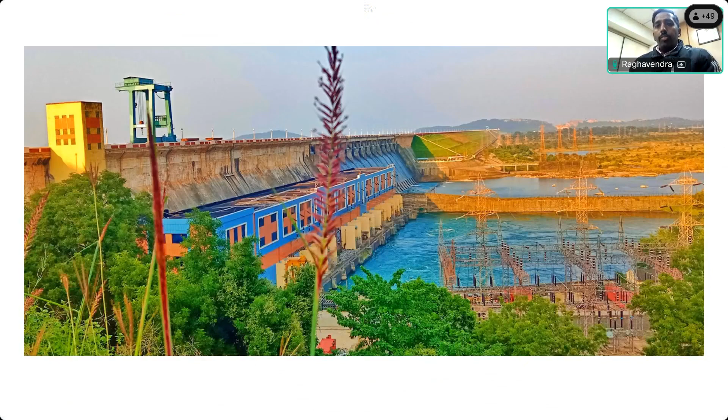Right now, as a JE, you will be posted in field offices mostly, where you will be collecting data and site observations. So you might not be knowing why design is required. At the end of the session, I think you will be able to appreciate how whatever you are doing at the sites, at the river sites or remote areas, will be useful for the design of all these water resources projects. We will see all those aspects, so that you should know at least what we do in the design wing of CWC, so that when you become AD or even DD, we expect at least some of you should come into D&R wing and serve this wing, because many people think designs are very complicated and difficult to do, and most people prefer WP&P or RM wing only.

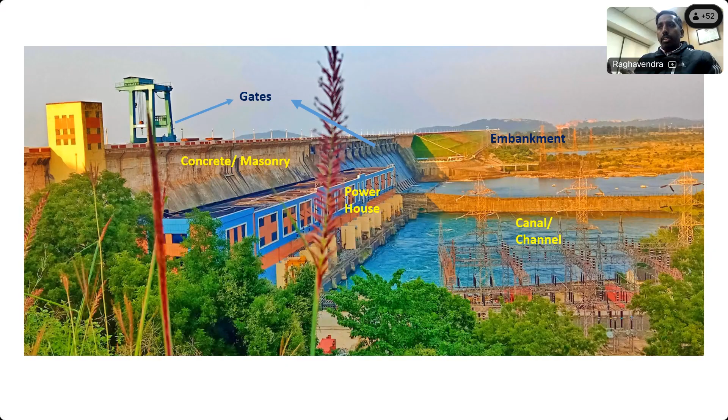There will be so many JEs in your team from mechanical background also. I suggest mechanical people to take up the gates directorate, because in CWC it's a general practice that mechanical background people will be posted in gates directorate. Some civil engineering candidates also work in gates directorate, but it's mostly preferable for mechanical. So when you're thinking, why am I here measuring the river discharge at site as a mechanical engineer - that's just passing your JE time and AD2 time. Once you come to headquarters, try to prepare for posting in gates directorate so you can apply all your mechanical engineering knowledge there.

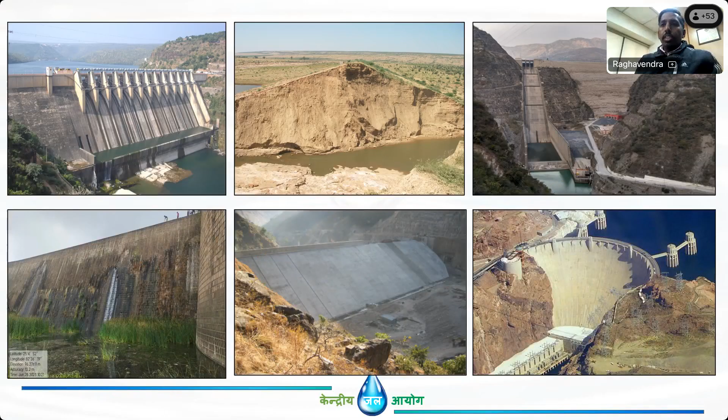So this is the background of our design unit, and these are the different components showing how we separate into different design directorates. If we see further, all water resource projects start from the dams.

So there are different types of dams. I think by now you might be identifying these different dams. Let's go ahead one by one. The first one you can see is a concrete dam. The other one is an earthfill dam - you can see it is a failed section, this is the dam in Rajasthan, Gararda Dam, which failed in the first filling itself. That's the section we are seeing here in the earthfill dam. You can see it's a complete same color material - this dam we call a homogeneous earthen dam.

The other type of dam is rockfill dam. It's nothing but an updation of the earthfill dam, because as the height of the dam increases, we will have some clay core in the central portion, and also coarser materials. These fine materials will be sustained only for some heights. This rockfill dam you are seeing is the Tehri Dam. Tehri Dam, we all know, is a rockfill dam.

The other type of dam is masonry dam. Masonry is an old concept - nowadays we are either going for concrete dams, earthen dams, or rockfill dams. But masonry is old dams; still there are so many dams built in India from long time, so there will be so many issues.

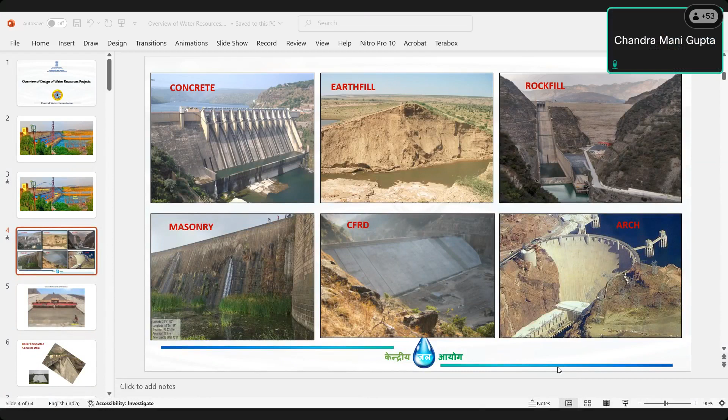I will just go very slowly. Meantime, whenever there is any disturbance, just try to see the slides, because this is only regarding the design overview. But at least you should be able to know the difference between these dams. Is everybody clear about the difference between concrete, earth filled, rock filled, masonry, CFRD, and arch dams?

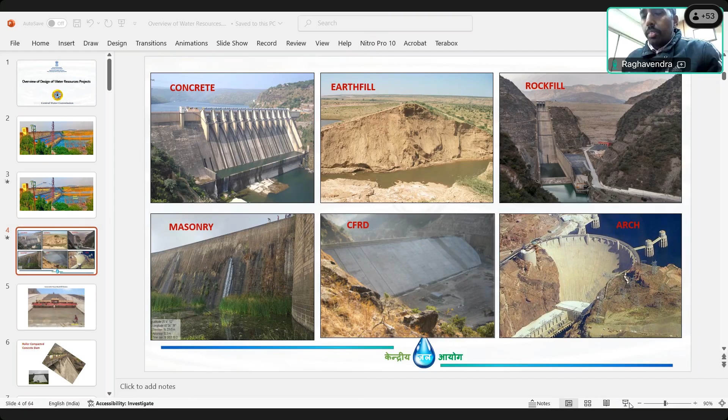Hello. Shall we go ahead with the others? Next slide. Yes sir, yes sir.

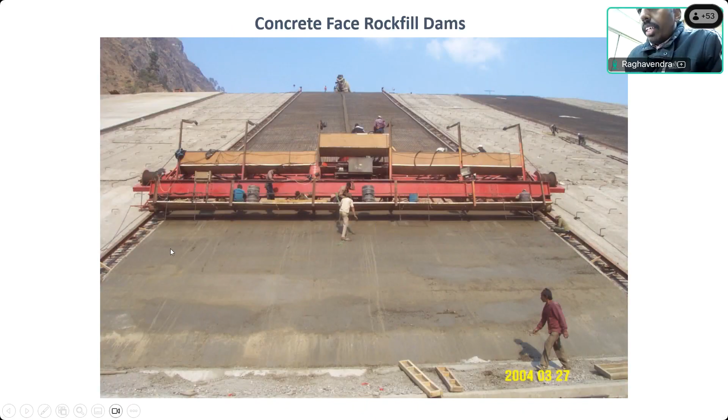As I have already explained, this is concrete face rock fill dam. In the upstream face we will have this concrete facing, as you can see here. First we complete the embankment dam portion, and in the upstream face we just have these concrete panels, constructed panel-wise, as you can see on the screen.

The other important dam is the roller compacted concrete dam. Can anybody tell me any dam existing in India of this roller compacted type? In Maharashtra we have the Ghatghar dam. Ghatghar dam is completely an RCC dam, meaning roller compacted concrete dam.

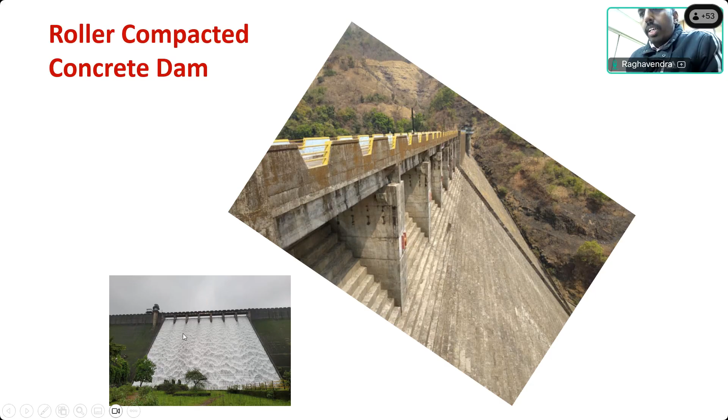It's useful for very small purposes, like check dams or small nalas, where you want 2 or 3 meters of diversion. For that purpose, we use rubber dams. Hope everybody is clear till now.

Hello? Can anybody hear? Yes, sir.

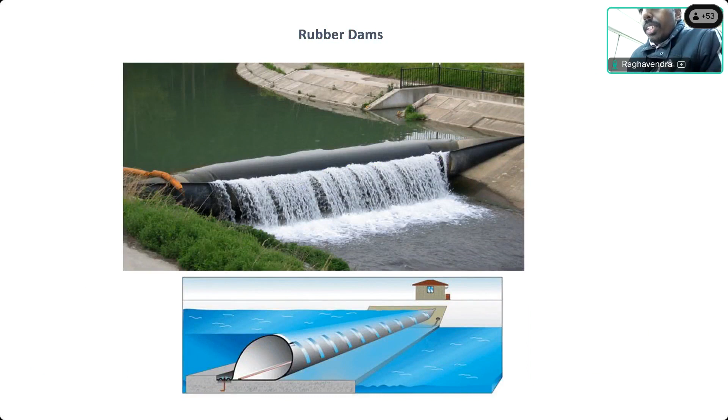So we will go into more detail - how to fix the dam axis. I think some of the JEs among you are working in investigation divisions also, and they are involved in the investigation of these projects.

Some dam axis will be very lengthy, some will have a very small, shortest portion for the dam, and as we go downstream, more water can be stored. So there are different aspects to consider.

We have to see the geology - what rock is available, what soil strength is available, and whether we can keep the foundation on that particular geology or not.

So we have to see the geology, we have to see the water availability, whatever you are collecting. And we have to see the narrow portion. Wherever possible, we have to use the narrow portion to select the dam axis.

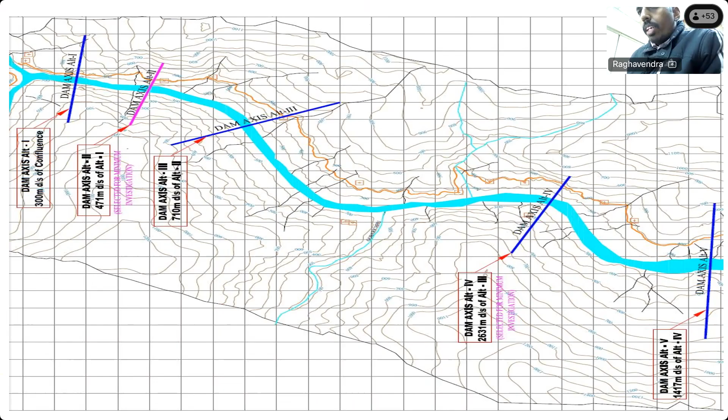So like this we have to finalize the dam axis. Once we finalize the dam axis, for the remaining components, at the dam axis we can estimate the dam design flood, then we can design the length of the dam, everything that I will cover in the coming slides.

So most of these projects, whether irrigation, hydroelectric, or drinking water projects, we all do some cost-benefit analysis, the benefit cost ratio. This means whatever cost you are incurring on the project, and what benefits you are getting from it, we do an analysis of the benefits and costs to get this ratio.

It's always better to have a benefit cost ratio more than one, because it's a general practice - whatever cost you are putting into the project, you should get profit more than the cost of the project. That's how you calculate the benefit cost ratio.

Based on the benefit cost ratio, you will also be able to select which projects should be taken on priority. Whatever DPR you do, the major basic purpose of the DPR is to evaluate the technical feasibility and financial feasibility. Technical feasibility means we have to see all the hydrology, geology, and dam designs, and financial feasibility is in terms of benefit cost ratio - what benefits we are getting and what cost is associated.

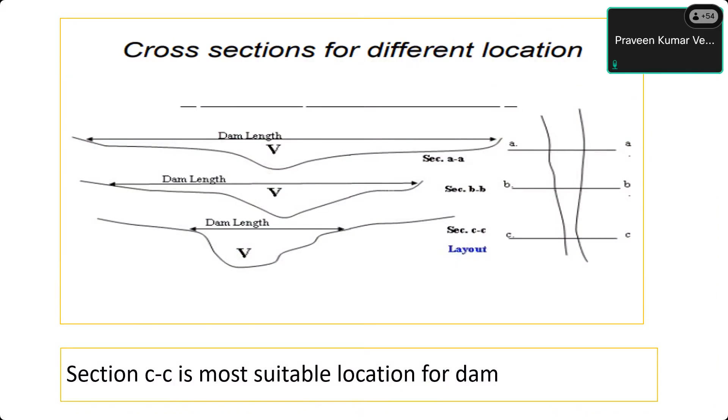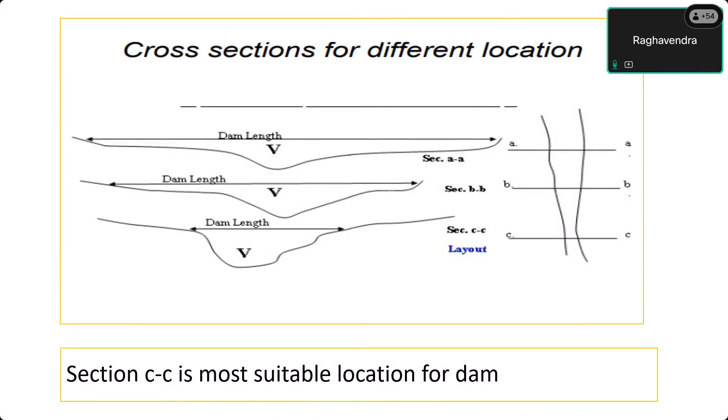So like this, we have to finalize the dam axis. The dam length is the first important criteria. Other criteria also I will try to explain. Just from here we can see the layouts. We have completed different types of dams, and how to select this dam axis, and why this is very crucial at the first step.

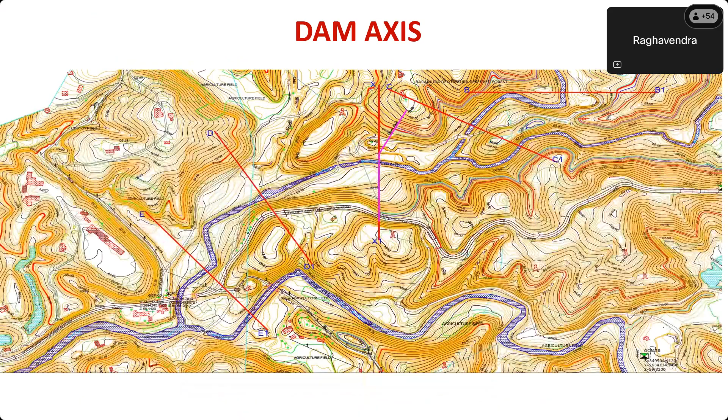So the first will be dam. Then from the dam, the water will be going through the HRT, which means headrace tunnel. Then from the headrace tunnel, the water goes to the surge shaft. Then from the surge shaft, using the penstocks, the water will go to the power house. At the power house, we'll be having turbines where power will be generated, and from there it will be transmitted using transmission towers. Whatever transmission towers you see in general places, power is supplied from these power houses. So the purpose of the HRT is to divert the water from the dam to the surge shaft, and from surge shaft to power house by penstocks.

Now, the purpose of this surge shaft - because the length of this HRT sometimes goes up to 10 kilometers, sometimes just 1 kilometer. So depending on this length, if you suddenly close the power house, there can be grid failures. In India we have power grids - earlier we used to have 4 power grids: northern region, southern region, eastern region, and western region. Each grid has so many power projects - thermal power projects, solar projects, hydro projects, all supplying power.

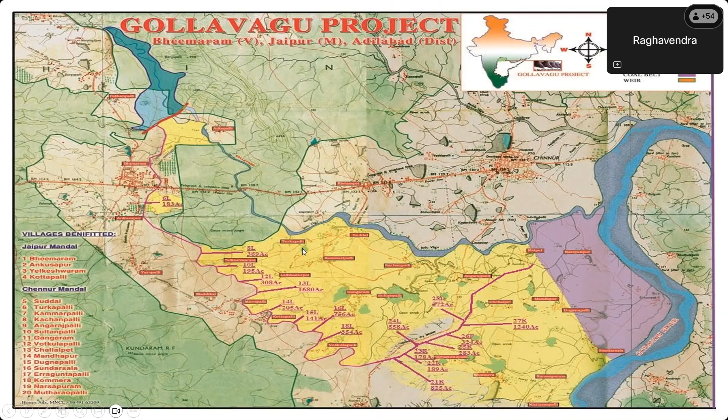So this is an irrigation project. Generally we prepare irrigation command maps like this - this is one irrigation project in Adilabad district of Telangana. The yellow shaded portion you see is the command area. All these pink colors and red color lines are the canal. You can see this - this is the dam. From the dam you can see the right side canal going like this, and wherever this yellow portion is there, that is the command area - that is where we are supplying the water to have the irrigation.

So if you see that same layout in GIS - because most people will be doing using ArcGIS and other GIS platforms - we try to provide that image here. So this is the dam where we have created the storage. From the dam you can see one canal off-taking like this. Obviously, just near the dam there won't be much requirement of water, because groundwater will always be high there. Then as you go down, you can see different branch canals, each planned for different areas - some 369 acres, 59 acres, 195 acres, like that. So each branch canal is planned accordingly.

So first we have to estimate the command wherever you require the command - first you estimate the demand of the water, and accordingly you can design these branch canals. So this is the layout of an irrigation project - it will look like this only. If this is the right side canal, you can also plan for the left side canal.

And there are ridge canals. That's a separate detailed subject. But you should know the layout of this irrigation project, how this irrigation project layout looks. So this is how we can plan the irrigation project and its layout.

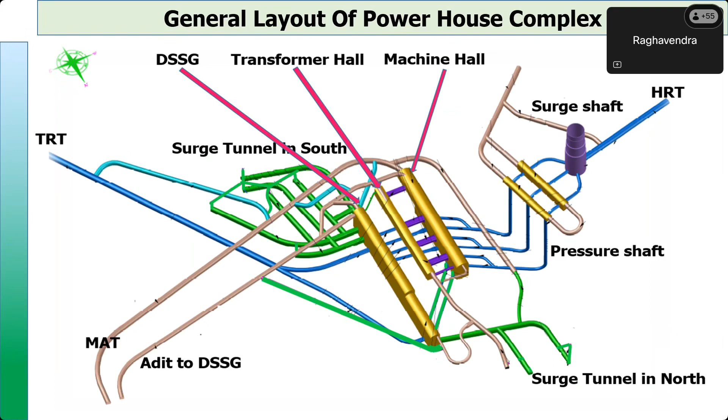Whatever power we generate will be transferred through transformers. What is the purpose of a transformer? Because in the power house, we generate power at 11 kV or 20 kV, a very low voltage. But to supply it to long distances, remember these hydro projects are located in very remote areas, some in Arunachal Pradesh, some in extreme Himalayas, some at the far ends of rivers.

So from there, we get the power to Delhi, Pune, all the cities. How do we get this power through the transmission lines? The transformer does this stepping up. Whatever voltage we generate in the power house, we have to step up. After stepping up, it becomes very convenient to transfer electricity over very long distances, even 1,000 kilometers. So that's the basic concept, just explaining here for your knowledge.

But generally we don't deal with all this electromechanical, power components, power transfer in CWC. In CWC, what we deal with is the dam. We do the designs of the head race tunnel, the surge shaft, the pressure shaft, and the power house, only the power house dimensioning. We don't even design the turbines.

Turbines and all these transformers are dealt with either by CEA, Central Electricity Authority, or by private companies, since there are many private developers also. They can also do these designs. So in any project, whether irrigation or hydro, along with CWC we have to involve other agencies, since we are only involved in the water sector. There are so many other components and agencies we require.

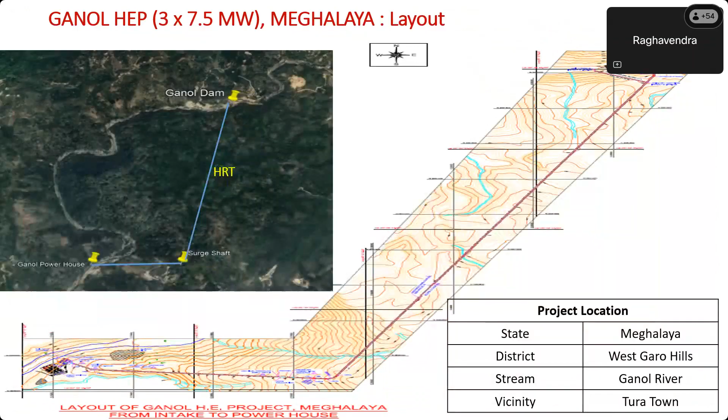CWPRS generally does all these studies on water, like when water flows through the spillway, how it will flow, and whether the flow is as per our design or not. They do the model studies. CSMRS, Central Soil Material Research Station, does the material testing, and GSI, Geological Survey of India, provides all the geological information and data. Even Survey of India, we can collect topo maps, contour data, all those things from them. So while doing the designs of all these water resource projects, it's not that we do everything individually.

We need collaboration from all these agencies, even remote sensing organizations like NRSC, ISRO. We have to involve those organizations too, and if it's a hydroelectric project, we have to collaborate with the Central Electricity Authority. So let me explain here.

In field offices we have monitoring and appraisal units. These units appraise irrigation projects only up to a certain command area. In irrigation we have major, medium, and minor projects. Minor projects, with less command area, are dealt with in the monitoring and appraisal directorates of field units, wherever you are posted. Now you can appreciate the importance of monitoring and appraisal directorates. They appraise these irrigation projects up to certain command areas only, like minor projects meaning 2,000 hectares.

If major projects, more than 10,000 hectares, they just forward it to CWC headquarters, so CWC headquarters does all these appraisals. That is for irrigation. For hydro projects, CWC does not have the mandate for appraisal. Appraisal of hydro projects lies with the CEA, Central Electricity Authority. While appraising the hydroelectric project DPRs, CEA forwards the DPR to CWC, because we examine all the civil components: dam, head race tunnel, surge shaft, power house, all these components.

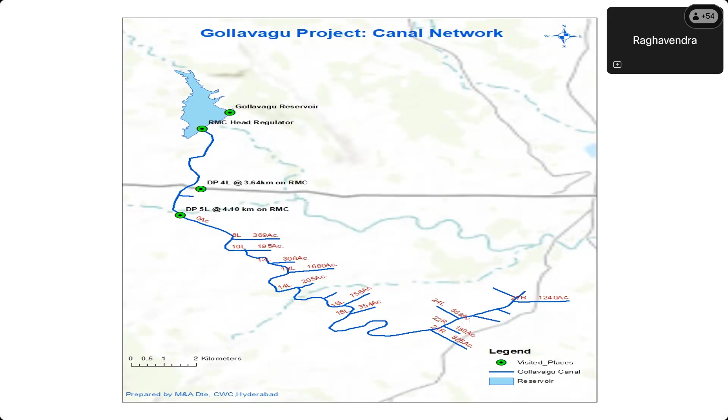So that's how the appraisal process works, and how we are involved in irrigation and hydro projects appraisal. I hope everybody is clear now about the monitoring and appraisal directorate, and how whatever data you collect is useful for the design of all these water resources projects.

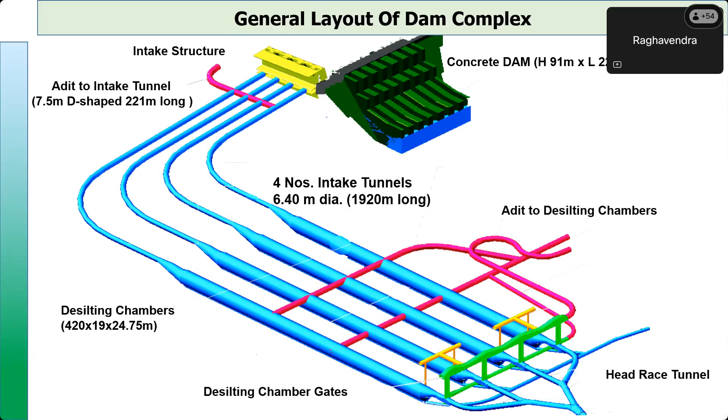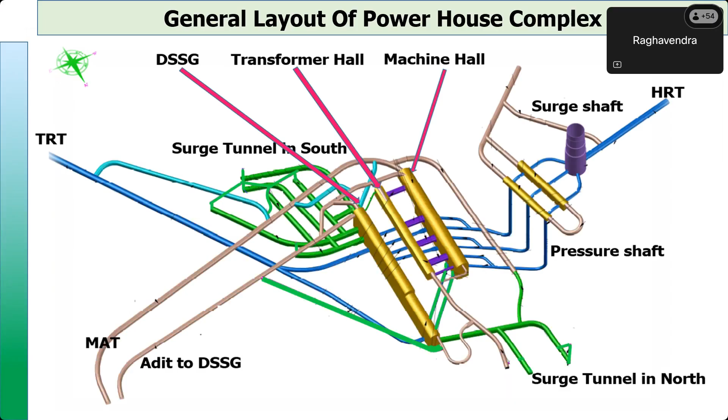Even the sediment data is very useful, because most of the dams get filled up with sediment. Like if you see the Salal Dam in Jammu Kashmir, it is completely filled up with sediment. So the basic purpose of dam construction is now getting lost because of sedimentation. That's how whatever data you observe at the site is useful for all our design purposes.

So moving ahead, these are different layouts of the hydro project. You can see the hydro project layout here. The dam is here, and you can see so many lines. On both abutments, both sides, this white color is the river. On the river left side, we have some tunnels, and on the right side also we have some tunnels. So this is a very complex layout.

If you see a simpler layout, the same project, the first image can easily be optimized into the second layout. That's how we generally examine layouts, and we generally avoid complex layouts. Complex layout means, as you can see, all these small dots on both sides are all tunnels.

Whereas in the second image, you can see all the tunnels are placed on one side. That's how, when we do the appraisal in our design units, we also check for different dam axis locations and different project layouts. You can see this first project layout is very complicated, whereas in the second image it's a very simple layout, with all the tunnels located at one place.

So why is it complex? Because the geology is very complicated. That's why, as I told in the beginning, since you are at the very start of your career, I think you should pick some topic of your choice — geology, hydrology, dam design, irrigation and canal design, or even remote sensing.

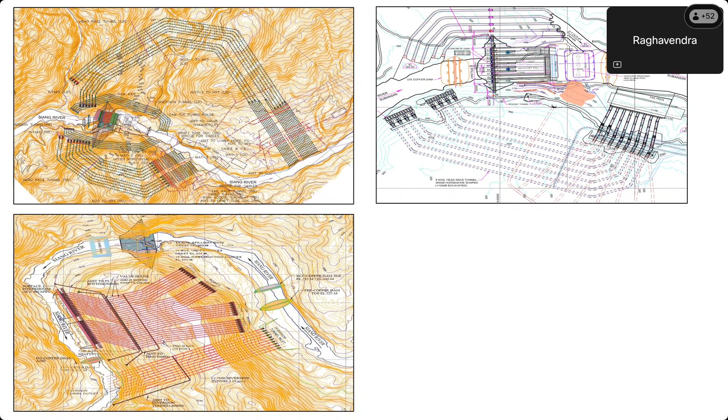So to start construction of any dam, we create a water-free area by diverting the water using tunnels, between these cofferdams. You can see here this is also a cofferdam — the tunnels on the left side are used to divert water during construction. This entire area will stay dry while we construct the dam using this tunnel, with water diverted through here. Once the dam is completed, we remove these cofferdams, store water in the dam, divert it through the headrace tunnels to the power houses, and generate electricity.

So now we'll see the different issues, generally what issues will be coming in different components. So this is the dam. So in the dam, we will see.

I already explained till now the foundation issues, because as the dam height increases, everything is stress. If you have a very small dam, very small stresses will come, small load will come. If the dam height is more, load will come. So we have to see the foundation, whether the existing rock or the available foundation can take the load or not. And shears, this is a new term. Just I will explain briefly, because wherever you have this foundation, it's all formation of this earth and rocks.

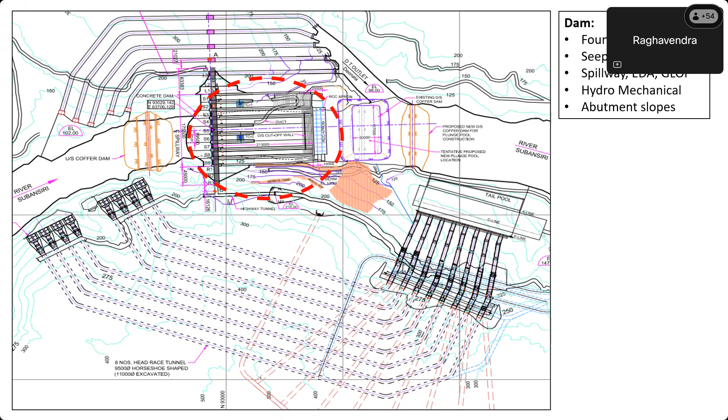So that's how these gates also play a very important role in designing all these dams. Next is the abutment slopes. In all our dams nowadays we are doing the design of 200-meter dams. To start construction, first you have to do the excavation - 200-meter excavation of the river, that side slope of the river. So that 200-meter slope should be stable, right? So those abutment slopes also we have to do the stability analysis.

Then if you see the issues related to power components, like I already told, sediment is the biggest issue. Whatever data you are measuring is very useful for sediment. Then again slopes, because wherever power houses are there, we have to again do slope excavation, so there will be slope issues. Then there are so many underground tunnels, even underground power houses, and surface power houses - surface power house means just like a building we construct on the natural profiles. But wherever underground power houses are there, there is big underground excavation we have to do.

So those issues, surges - like I explained, the purpose of the surge shaft is to absorb these surges. Like suddenly if you close the turbines, water hammer will generate. To absorb those water hammers, water shocks, you need to have these surge shafts. And all these structures - it's so common, even a normal building will show cracks - so in the dams also we'll see cracks, in the pondage and the power houses also we'll see cracks.

And flooding, because these power houses are generally located close to the rivers. So when the river is flooded, obviously the power house also will get flooded. So the flooding - where to keep your power house levels, how do you protect these power houses during this flooding - because of this Teesta III GLOF, dam is completely washed away, and even the power house, all the components got damaged.

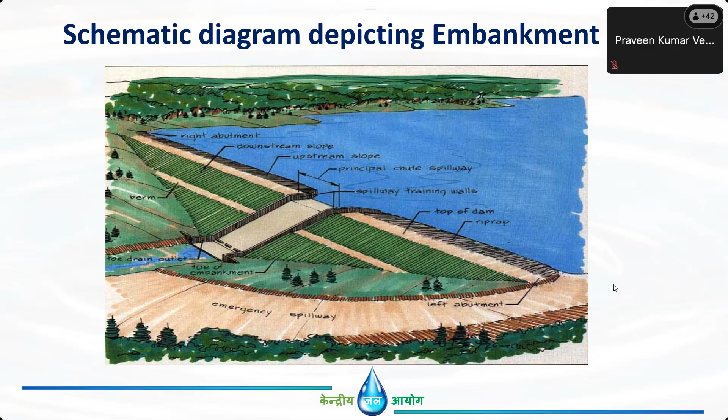In the first session we learned about the different design units and design directorates in CWC. I hope everybody is now clear about the design units of CWC. We have 5 different directorates and also 5 chief engineer level offices, called either unit, design unit, or design organization. Under each design unit or design organization, we have 5 different directorates: concrete dam design, embankment dam design, gates design, hydel civil design, and barrage and canal design. Each directorate deals with its own respective issues.

We have also seen the different layouts of projects, since water resources serve irrigation, hydropower, and drinking water purposes. So we have seen the layouts of irrigation projects and hydro projects. We have also seen the different issues likely to arise for all these water resources projects with respect to CWC - issues related to dam, power house, tunnels, and river.

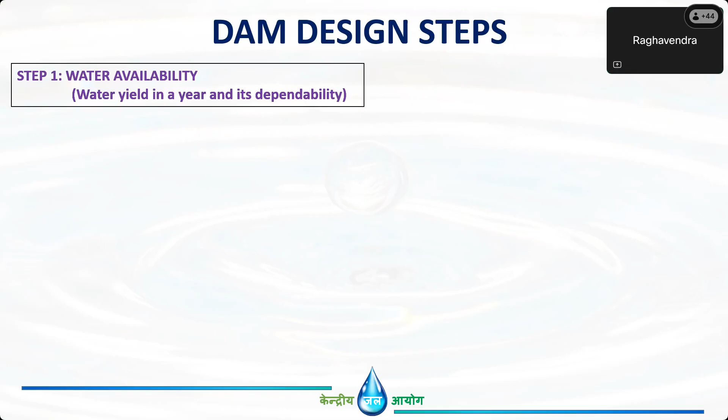Then we'll go for the second step. So in that second step, first we have completed our water availability. Then we'll go for the topographical information. What is topographical information? We have to do the surveys. I think most of you will be doing dumpy level surveying and river surveys, right? So the same thing - you have to do the surveys using total station and LIDAR and all other latest techniques. Even if you have GIS also, if you can generate contours, that is good enough.

So what we'll be developing from step 2 is contour maps, river cross sections, and area elevation capacity curve. The area elevation capacity curve is very useful in deciding the level of the dam. In one graph we will try to see, with different elevations, what is the volume of the reservoir and what is the area of the reservoir. The area of the reservoir will be used to know the submergence of the project, and volume will tell us the volume of the reservoir.

So this is step 2, and we'll go for step 3. Now we have collected both data - water availability and topographical information - and we have also developed the area elevation capacity curve. Now the next step is to fix the dam height, right? Before this step you could have thought even a 100-meter dam is possible, even 50-meter is also possible. But how do we fix that exact height?

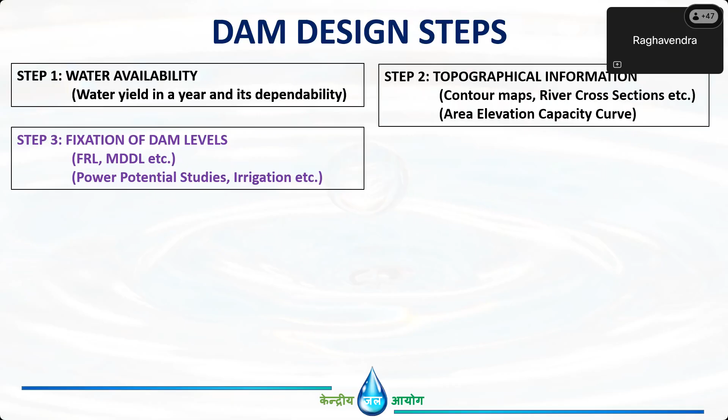We all know FRL means full reservoir level - that is the maximum water level we generally hold in our reservoir. That is full reservoir level. Then MDDL, this is minimum drawdown level - that means below this level we will not take any water. That is the minimum level we always maintain in the reservoir. So that is minimum drawdown level, and FRL is full reservoir level.

So these levels we will fix using the area elevation capacity curve. How we will fix it: if you are designing a hydro project, you have to do power potential studies. And if you are doing an irrigation project, you have to do irrigation simulation studies. So like I told, we have to involve CEA, Central Electricity Authority. The Central Electricity Authority generally does these power potential studies. They will tell us, okay, fix this FRL and fix this MDDL, like that.

Then for irrigation, we have a separate directorate in CWC, the Irrigation Planning Directorate. So they do irrigation planning, irrigation simulation studies, and they will fix these FRLs and MDDLs. As designers, we also do it on our own - we will sometimes cross check. And both of these are very simple.

The concept is nothing but a simple concept. Suppose let's assume storage at some particular level. There is some inflow, so obviously there is an increase in water in the reservoir. But at the same time we are taking water for power generation, or we are taking water for irrigation purposes, so again there will be a decrease in water in the reservoir. So inflow minus outflow gives storage - what is the change in storage? We have to do this simulation study for the whole year.

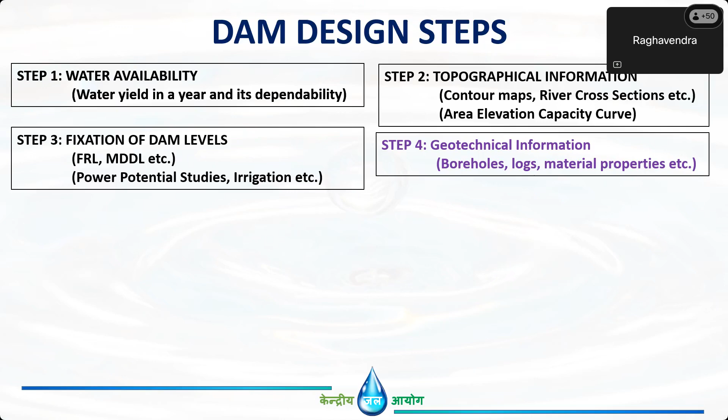So this is generally how we do the geotechnical information. Geological mapping means we don't do anything extra here, we just go to the site and observe what is present - what is the rock, whether it's soil or overburden or anything. That is called geological mapping.

Then we will do some drilling, the boreholes. Then sometimes in high dams, we will have to do drifting. Drifting means nothing but a tunnel, like manual excavation, just at our own height, 2.5 meters, like that. So we will have to do some small tunnels also, to know the geology or rock inside these hills.

Then nowadays there are geophysical methods - electrical resistivity test and seismic refraction, among other things. It's nothing but using electrical resistivity. I will not explain much, you can explore this geophysical method yourself, it's again like remote sensing. Geophysical methods are in demand, because without doing any borehole, we can get the data.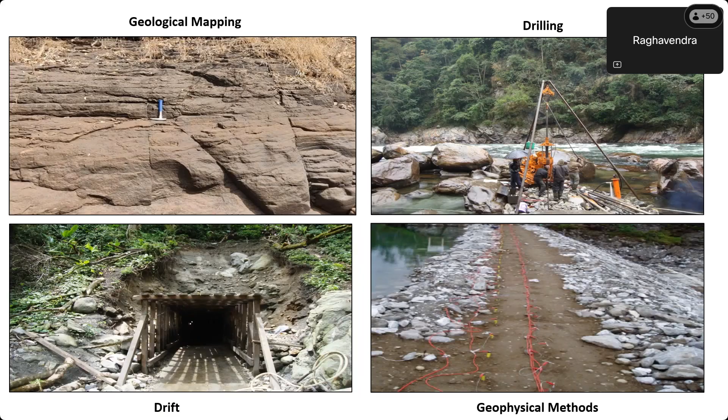So we'll see what we get from these four different test procedures: geological mapping, drilling, drift, and geophysical method. These are the different results from those four steps. In geological mapping, as I told, we do not do anything extra, we only go to the site. On the contour map, we have to prepare this contour map.

So in this contour map, you can see these triangular shapes - the small triangular shapes indicate overburden. This green color and different shapes are different indications of rock. Like that, you can see different colors, meaning different soil or different rock. That's how different color coding works. This is just geological mapping.

And boreholes - next we have done the drilling. In the drilling, we collect cores like this. You can see the box number, hole number, and at what depth up to what depth we have done this - here 36 to 40.5. You can see the cores, what rocks are there. From this you can easily estimate and prepare the log. The arrow indications mean the depth, showing how the drilling has progressed and how the depth has increased, showing the rock condition along the depth.

And the drift - you can see the small tunnels we have done. Those small tunnels are used to do some in-situ testing and also to estimate the surrounding rock, how the rock is there.

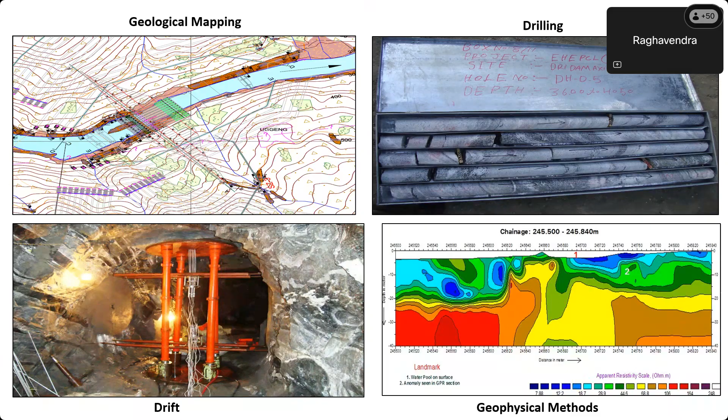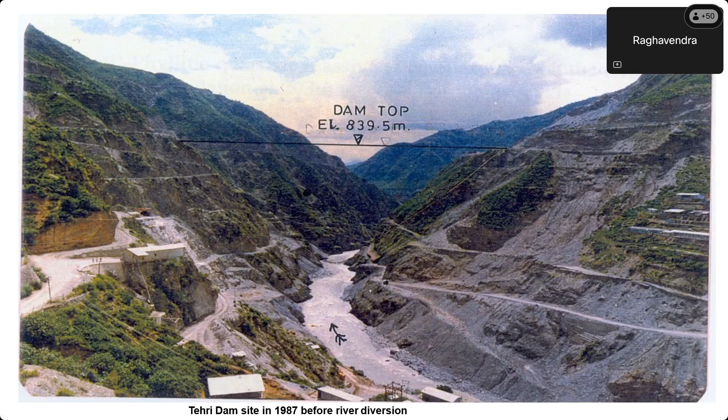That's how we try to get this geological data either from GSI, or you should also know all these differences, because as a designer, as CWC, we have the major role in design of all these water projects. So we should know all these things - at least basic geology you should know: what are the different types of rocks, how they have formed, how these geological investigations are carried out, and how we plot geological sections.

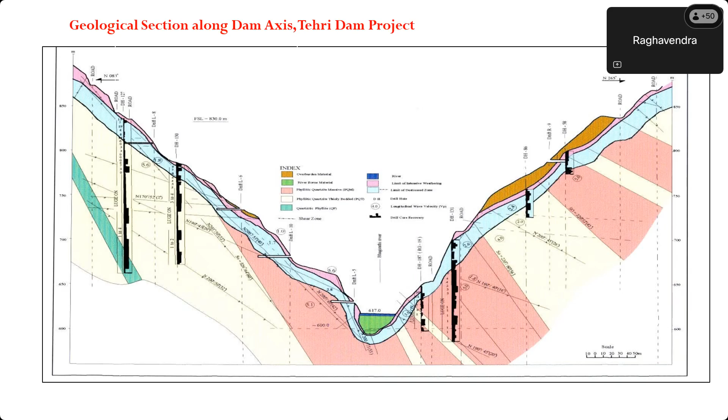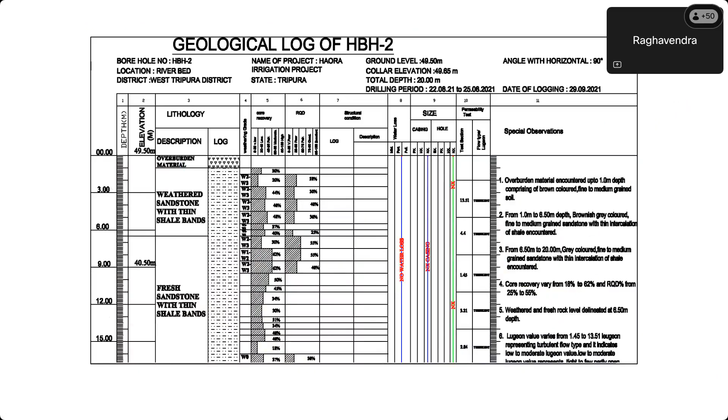This is the geological log - depth wise 0, 3 meters, 6 meters, 9 meters. So as we go to depth, what are the different rocks - like you can see in the starting overburden material and weathered sandstone, and then fresh sandstone. These are useful to know the limit of excavation, where we have to place our dam, etc.

And there are some laboratory tests, like I told - laboratory tests on soil samples, laboratory tests on rock samples, and in-situ tests. Going a little speedy - please collect this PPT from NWA and go through all these slides again.

Then the important step is the design flood. This is completely in CWC - that is what our HSO unit will provide us. So we have collected this geotechnical information, we have collected this topographical information, everything.

The important step now is the estimation of design flood. Depending on the dam type, we have to take different return floods - if it is a small dam, we have to estimate a very low return period, 100-year flood. Return period means everybody knows, right - after how many years it will repeat. If I say 100-year return period, it means in 100 years at least one time it will occur.

If I say 1,000-year return period, it means at least once in 1,000 years it will occur. So as the return period increases, the value also increases. Suppose a 100-year flood is 1,000 cumecs, then a 500-year return flood will obviously be more than 1,000 cumecs—let's say it may come to 2,000 or 1,500.

Depending on the dam type and dam height, dams are divided into three: small dam, medium dam, and large dam. For large dams, we generally go for PMF, the probable maximum flood, which is approximately equal to a 10,000-year return flood. This is because a large dam means large damage if it fails.

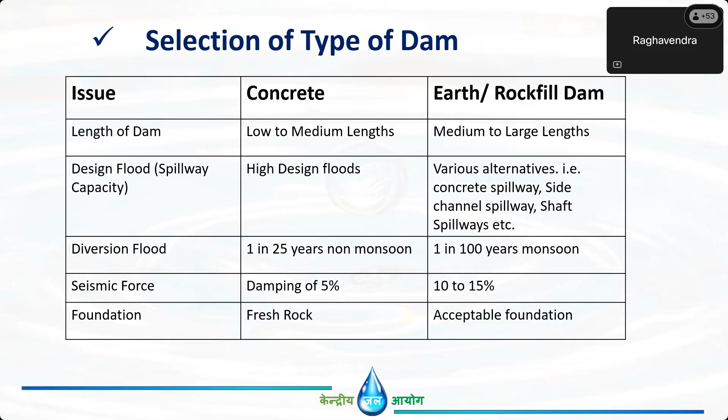So that's how we fix the spillway and finalize the dam type. Then we do the dam top, because we only know the FRL, full reservoir level, from step 3.

But over and above that, whenever you go to a dam site, you see heavy winds blowing over the reservoir. During these high winds, waves are generated in the water, like in seas and oceans. We have to calculate that wave height because of the winds—this is called freeboard calculation. We always have to provide this freeboard in dams, adding it to the FRL. FRL plus freeboard gives the dam top. That's the simple concept.

Then there's the maximum water level. Most dams fail due to excessive floods. Why? Because the design flood might be estimated at 1000 cumecs, but the spillway capacity in the dam is only 500 cumecs. So 1000 cumecs of river flow comes in, but you can only pass 500 cumecs through the dam. What about the remaining 500 cumecs? That gets absorbed in the reservoir. If the spillway capacity is less than the incoming flood, the extra flood is absorbed in the reservoir, causing a rise in water level—that rise is called the maximum water level.

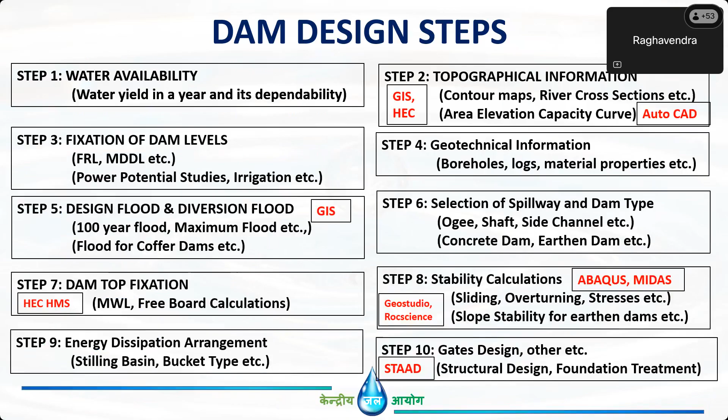Then I will go into a little bit more design detail, whatever stability analysis I mentioned in step 8, right? For the concrete dam, we will do the sliding, overturning, and stresses - do the stability analysis for the concrete dam, because all the design is based on different conditions.

If you are designing any power house, tunnel, dam, anything, you have to first see its reality - in reality what are the different conditions that will occur, like what is the construction condition, one is extreme conditions, one is the normal conditions. So these are the general philosophy for any design of any component.

Even if you design for gate design, canal design, slope design, power house design, dam design - you have to design for the construction condition and also normal condition. Normal means regular condition. And one we have to design for earthquake condition - what if earthquake happens? And another condition is what if excessive flood happens? So these are the general design philosophies.

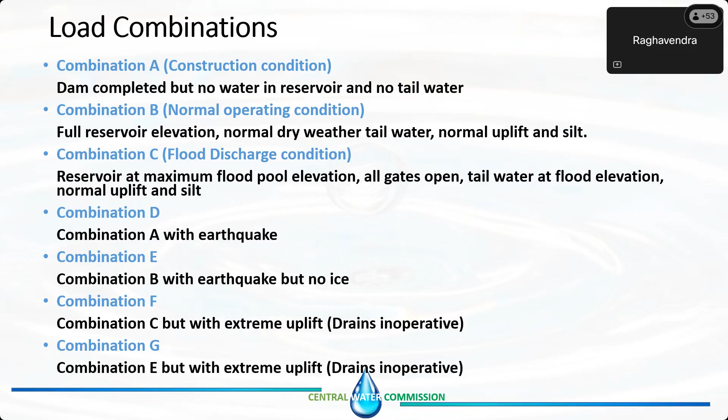In dams, we design for these different cases, like combination A - construction condition, then normal operating condition. Accordingly, we have to take the different loads. Suppose if you are designing any component like a gate for the earthquake condition, then you have to take appropriate loads into the design. So that is the design philosophy.

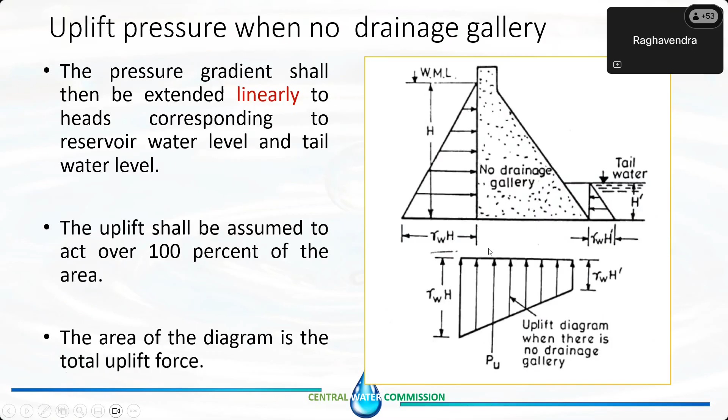Then in dams, we do uplift calculations also, because once you store this water, hydrostatic load will apply horizontally, and there will be some water seeping through the foundation. So the foundation will have some water pressure - that is called uplift pressure. So to reduce the uplift pressure, we provide galleries.

So these are all just I'm leaving for your work. Just go through the slides also, you will just understand all these things.

Then we'll do the sliding analysis, sliding factor of safety. Most of the design philosophy is based on the factor of safety - how much factor of safety you are incorporating in your components. Even your gates, to lift the gate you will have different hoists, different cranes, and the cranes will also have some factor of safety. Suppose the crane is lifting a 100-ton gate, we will try to have a capacity of 150-ton crane. That means 1.5 times more capacity of crane we are keeping at the dam. Same thing in the dam - if the dam is sliding, that factor of safety should come more than 1.5.

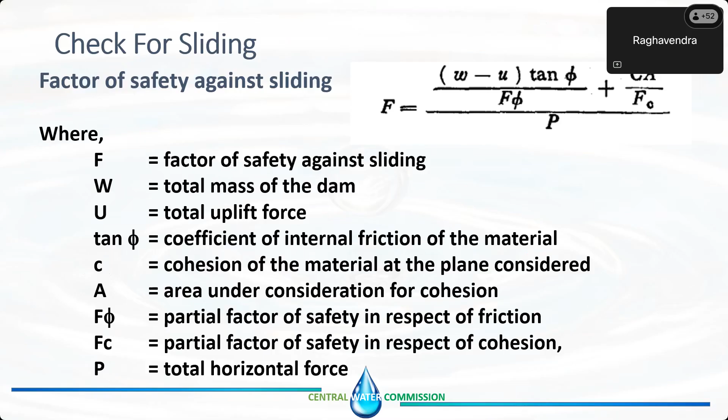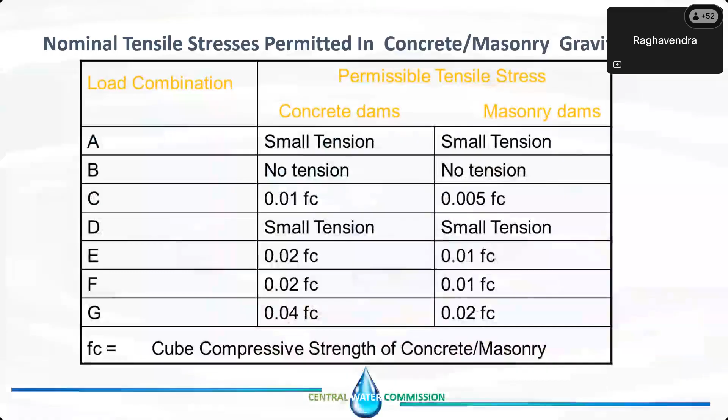So these are the permissible values of tensions or compressions. You can see the different load combinations and different values, stresses. Everything has a factor of safety included. So it's a general design philosophy. Now you can see some problems, I'm just trying to mention here.

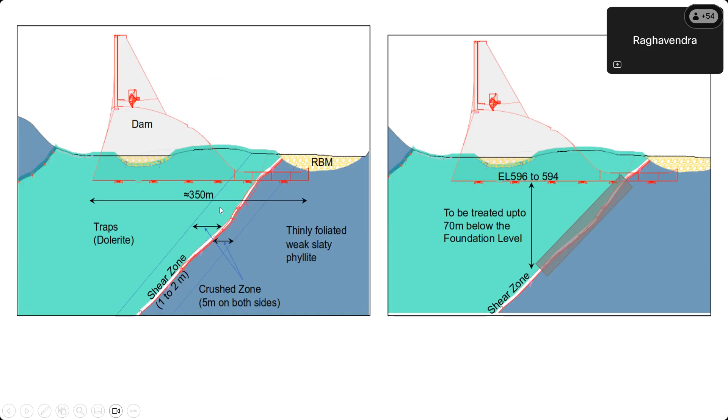In the reality, you can see the red color in this image. This is the shear zone, that is a weak rock, like a clay. If you see in the image, the junction between these two different colored rocks, this white color is a shear zone. That means it's a clay type material, so it will not take any load, right? It will cause very huge problems in the later run.

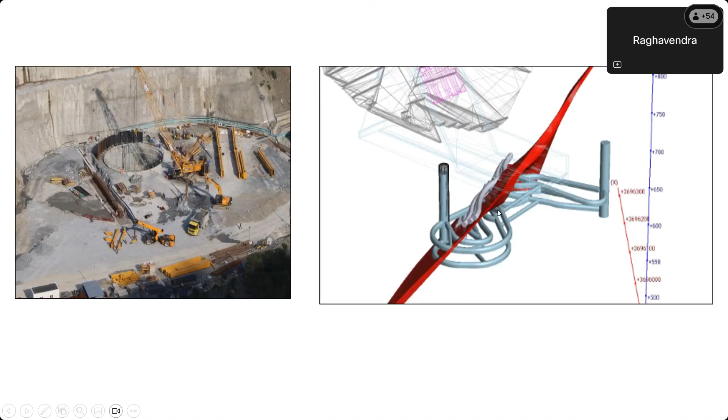So to avoid those problems, in the initial stages only we excavate or remove this, or we have to strengthen this. So they are removing this using vertical cylinders, right - these are the shafts. So vertical shafts they are excavating, and they will remove this material and fill it with concrete. You can see on the left side image, these are the shafts they are doing this.

So that's what I'm saying - every project is a unique project in water resources, so you have to design accordingly. So just some more issues I will try to explain.

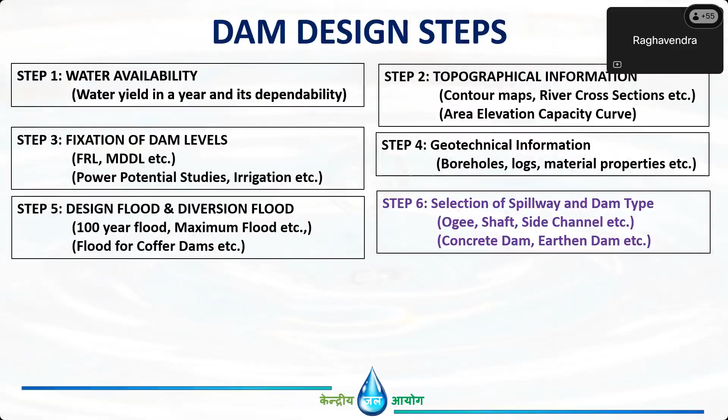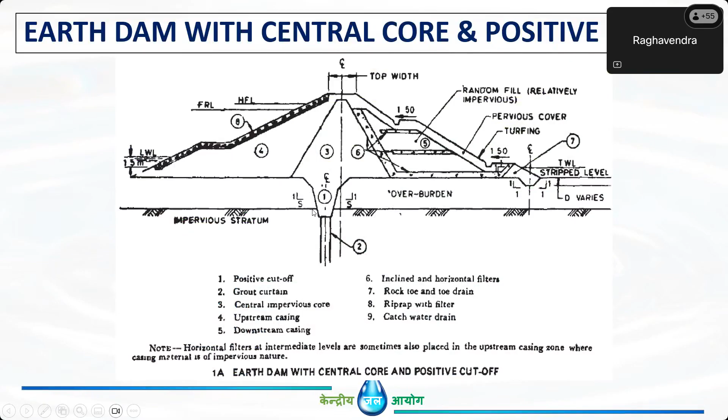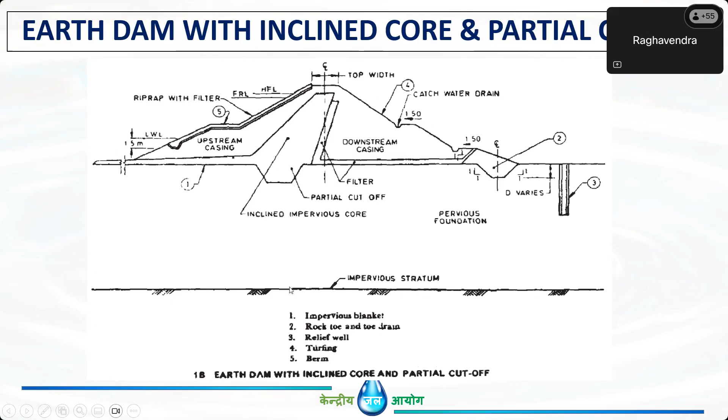So further, suppose if you cannot provide this kind of layout, you can go vertically with some obstruction for the seepage, like this plastic concrete cutoff wall. This cutoff wall means - you can see this is the earthen dam portion. In the central part, we will be excavating some 1.2 meters, completely remove that material and fill it with cement concrete. So you can see the wall - the complete wall is prepared at this portion, like this diaphragm wall, so that seepage is stopped.

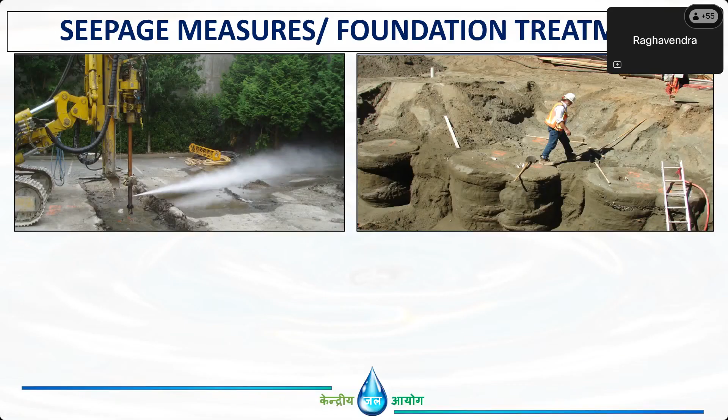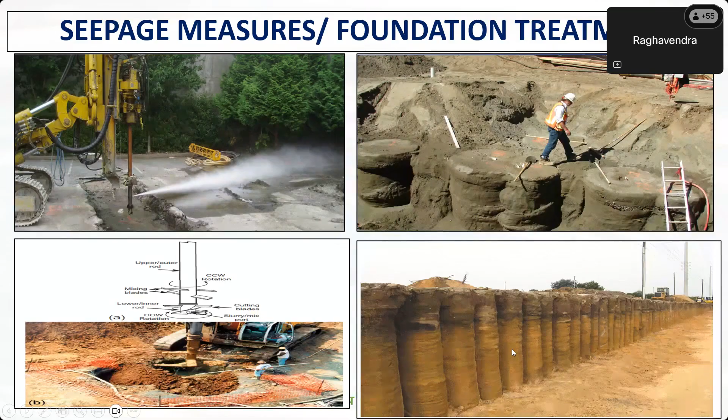Other measures include jet grouting - this is a high pressure jet grouting. If you do the jet grouting, vertical walls will be formed in the foundation. Also, sometimes you can have soil treatment. In the bottom image you can see soil treatment. That's how you can stabilize and reduce the seepage using jet grouting, soil treatment, everything.

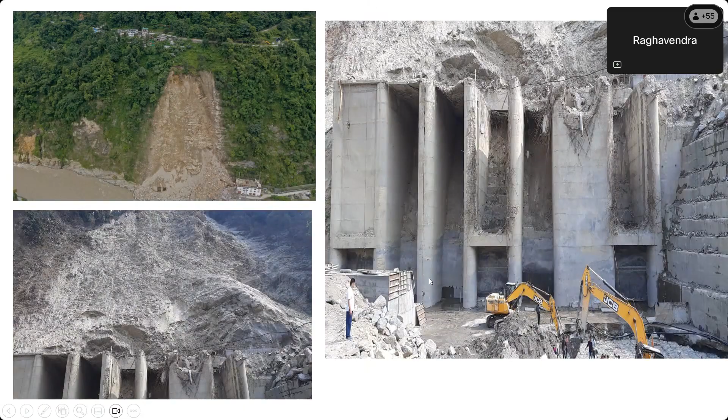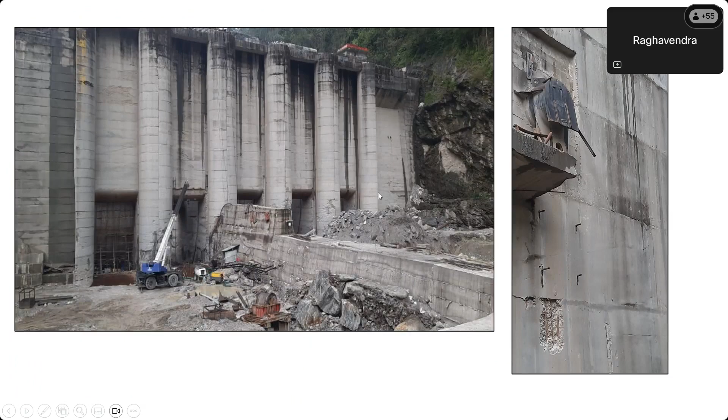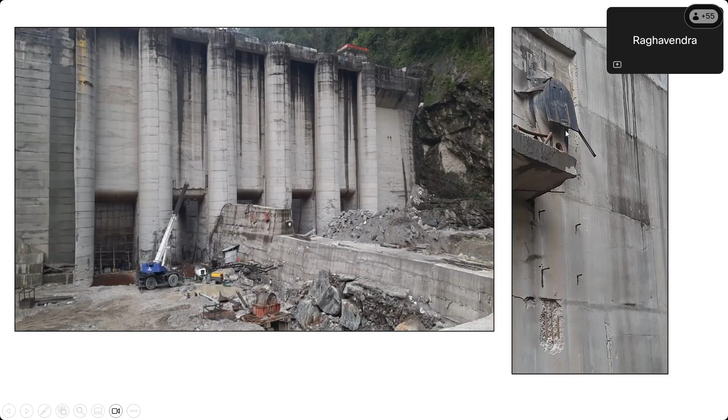So downstream of that project is Teesta 5. There too you can see so many damages, and some slope damages also happened here. You can see the dam, the spillways, the gate cutting - this is the gate hoisting arrangement. You can see the cutting - this was not cut manually, it was cut by the flood. You can see this much thick steel was cut by the GLOF flood. Now you can see the devastating effect of these GLOFs.

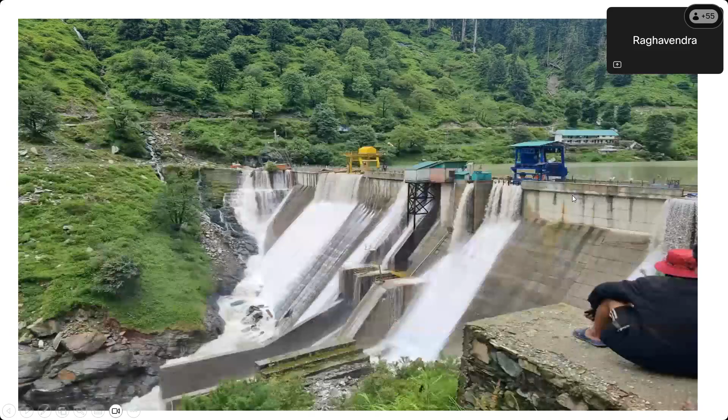One more general aspect is, like I told, we should not allow overtopping. Once you do overtopping, you cannot avoid problems, because it will cause abutment problems.

And in the designs, you should also have the instrumentation data - you should have very good instrumentation. Instrumentation means it will measure readings at regular intervals. While constructing the dam, you should have instruments placed in the dam body that give readings like stress, strain, uplift, everything.

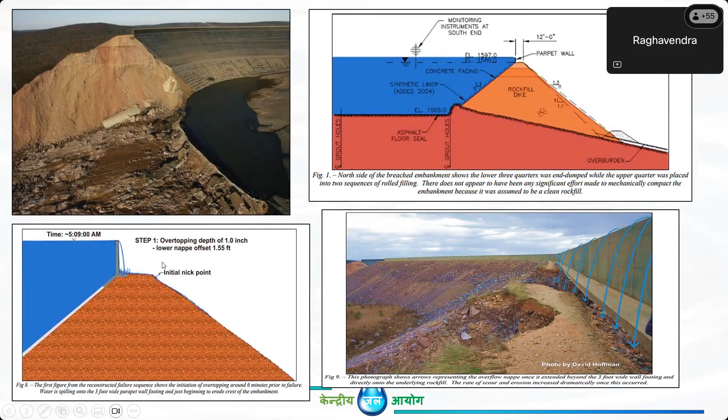So this is one case study in America. What happened is when the reservoir was filling, it was giving wrong readings. Earlier it was supposed to give the FRL level, but the instrument failed. So it was giving wrong readings, and they didn't know the exact level. They thought it was working well, so they kept pumping water into the reservoir. Ultimately, like I told, earthen dams fail by overtopping. So after that, you see what happened - they kept pumping water up to the dam top because of the faulty instrument. This is the problem - this is the dam failure that happened.

So if you just look - I will just take 5 more minutes, nothing, after that we'll take any questions. So if you see...

Either the canal can take off from the dam body itself, either right bank main canal or left bank main canal. Sometimes the dam will be very high, like 50 or 60 meters, but the command area requires maintaining a certain head, and also you should maintain very low velocity in the canal to avoid erosion.

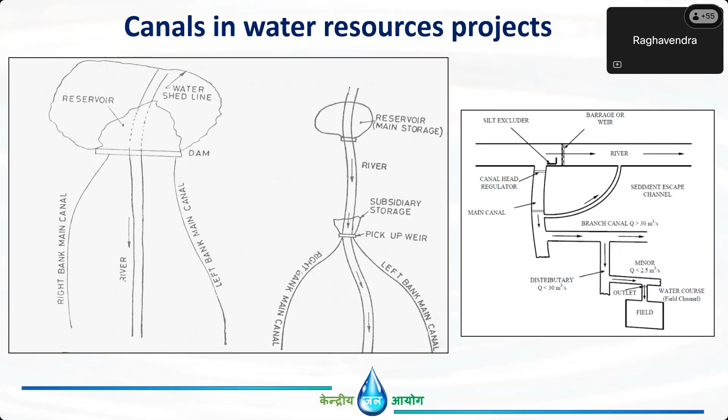Whatever I've briefly explained here, just try to observe whenever you go to any dam or irrigation project, why they selected that particular site, why they took that particular layout, why they chose left bank canal only or right bank canal, and why they placed the tunnel on a particular bank.

These are the different components you can see. In the left image, this is just a weir, meaning a 1 or 2 meter concrete structure, like a rubber dam I mentioned. Whenever needed, we inflate it to get 1 or 2 meters of storage and divert the water.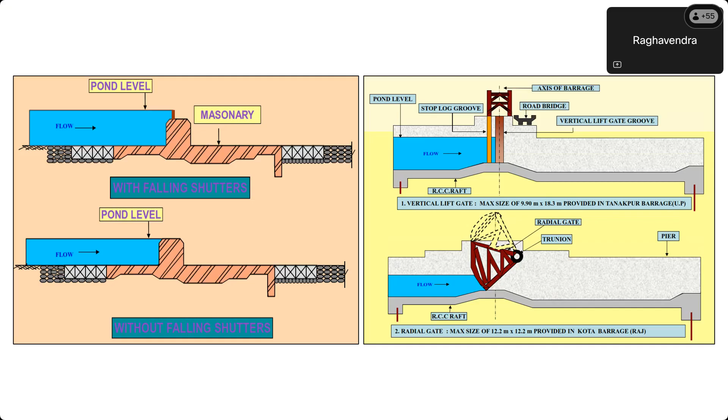The further improvement is the barrage. Barrage means we have a gate here, as you can see in the second image. That's the difference between barrages and weirs. This is a simple weir with no gate, while the barrage has a gate.

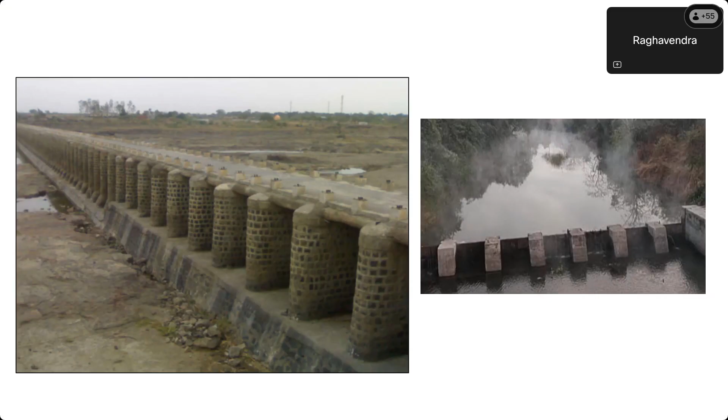Whenever you want to store water, as in the right side image, they place wooden planks or steel plates to store water up to a certain height. When there's no requirement, they lift those wooden flaps or steel gates manually. This is a general, very typical layout of a barrage, and it looks complicated.

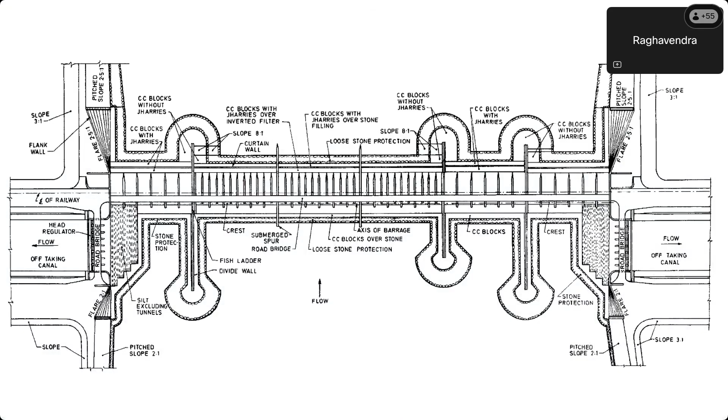But when you see it, it's all very easy. I will explain it in cross section. These are some barrage design steps I have mentioned here, so just go through these slides.

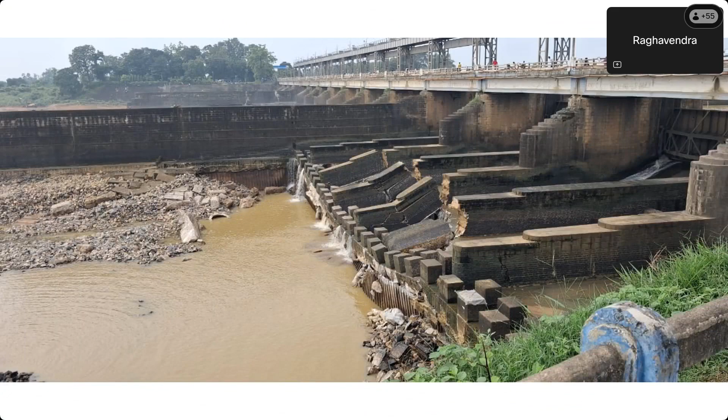You can see the failure here. This is very recent, the Tilpara barrage in West Bengal. You can see how the barrage failed. As I always say, in major water resources projects the main problems are seepage, erosion, and foundation issues. In embankments and barrages, seepage is the biggest issue.

Also in barrages, erosion is a major issue. You can see on the downstream side these concrete blocks, and the bottom water level is almost 5 meters different. In the beginning of the project, 30 or 40 years back when it was constructed, the riverbed was up to this concrete level, but over time it got eroded.

Obviously, the barrage is generally placed on sand only, so the sand got settled and you can see the cracks. This is a complete failure of this barrage. Along the length, all the piers failed at the same point, meaning complete settlement happened at that point.

So this is the barrage section. You can see upstream sheet piles and downstream sheet piles, which we generally provide to stop erosion. Sometimes we also provide intermediate piles.

The other important aspect is that we have to estimate the seepage using Khosla's theory, which all of you worked out in your BTech times. This involves how we estimate the seepage length or critical exit gradients, the depth of the sheet piles, and the different uplift pressures. That is the core concept of barrage design.

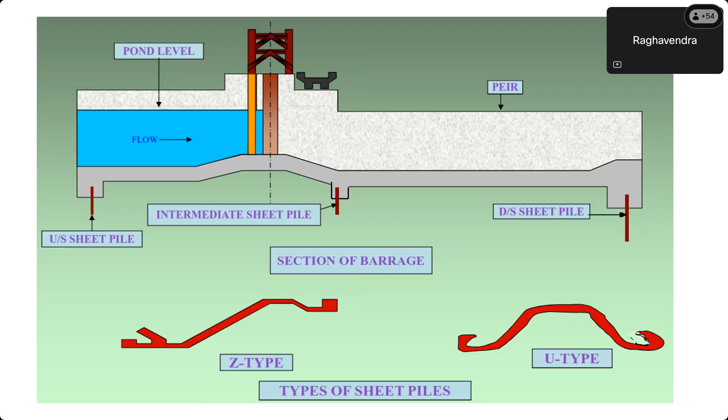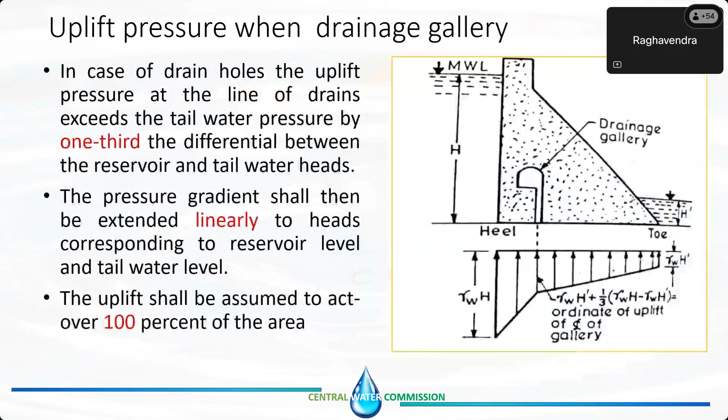So we have now completed concrete dams, embankment dams, barrages, canals, power houses, gates, and even slope stability. If there are any questions, we will take them up for a few minutes before we break.

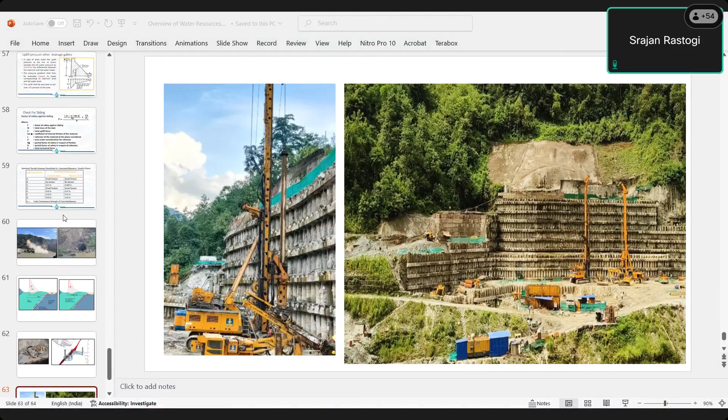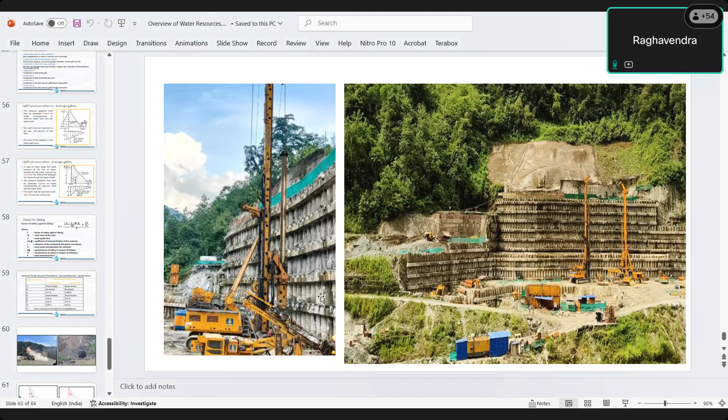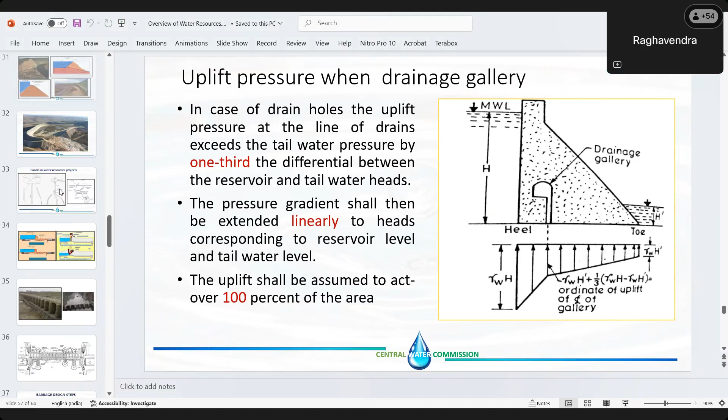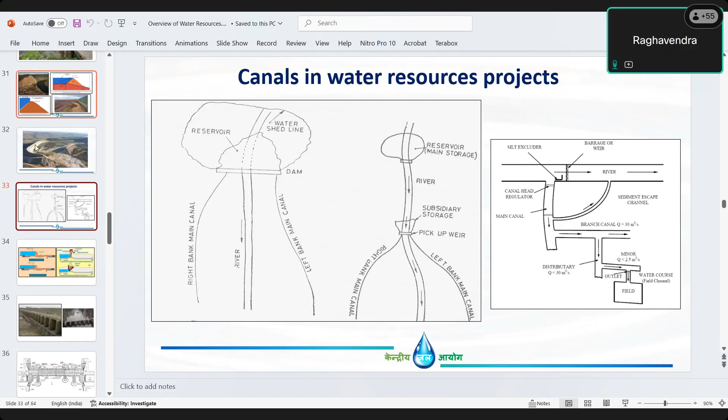Sir, all these three or four kinds of dams, we can call it earthen embankment dam. Hello sir, I think we are again - Raghavendra is missing.